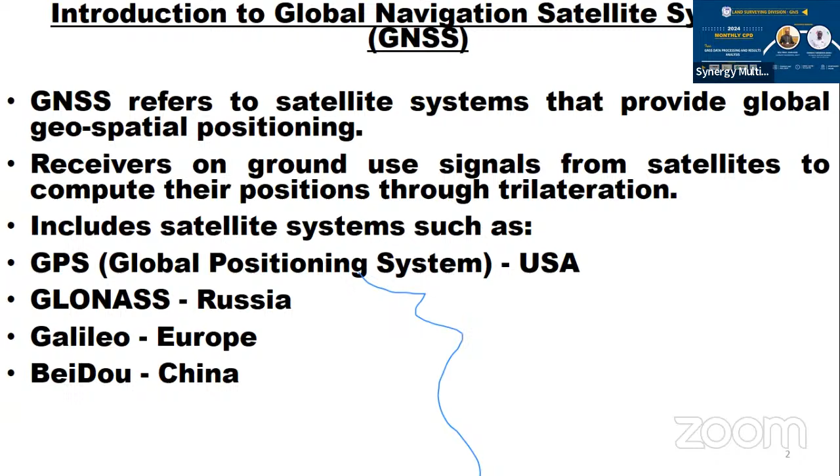We are talking of satellite systems such as GPS, the Global Positioning System, developed by the Americans. Then we have GLONASS, developed by the Russians, the European satellites known as Galileo, and the Chinese ones known as BeiDou. And now there are receivers that can receive signals from all these systems, hence the shift from simply using GPS to GNSS.

Well, GNSS has three main components. We have the space segment, the satellites orbiting the Earth. With our receiver, we need a minimum of 4 satellites so that we can have a fixed solution of our location. These satellites send their location signals, which may be received by our receivers on Earth.

Then we also have a control segment, ground stations which monitor and manage the satellite systems by sending them data for controlling and calibrating their own positions. A typical example of a station we can use on the ground to control errors is a base station, which is normally set on a fixed position, and which we can now replace with our various CORS stations. Then we have the user segment, the receivers that individual end users carry on the ground.

So the question is, how do the satellites themselves know their position? They determine their positional information using a combination of precise timing and clocks, regular updates from the ground control stations, and also orbital mechanics calculations.

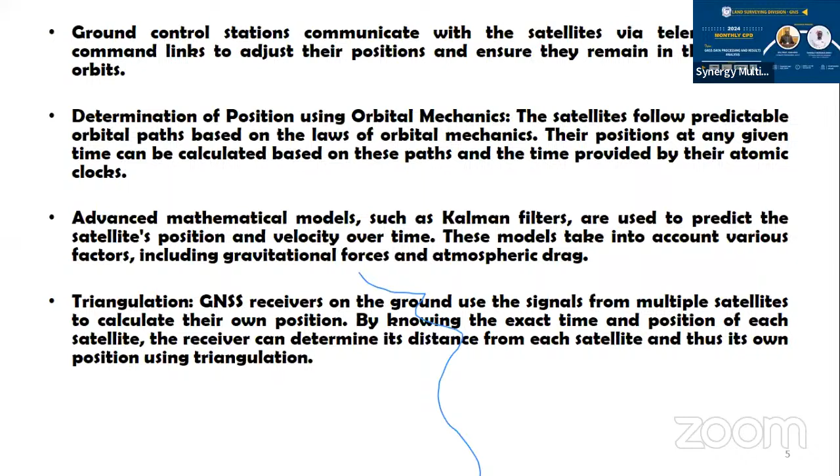Now, what kind of data are we receiving from the satellites? The satellites will be sending us what we call pseudo-range data. That represents the distance between the GNSS satellite and a receiver. It will not send the distance directly, but when we receive a signal, it also sends the time at which that signal has been sent. And so when we receive it, we can calculate the time difference between when the signal has been sent and when it is received. And that can be used in computing then the distance of the satellite from the receiver position. And that is what we call pseudo-range data.

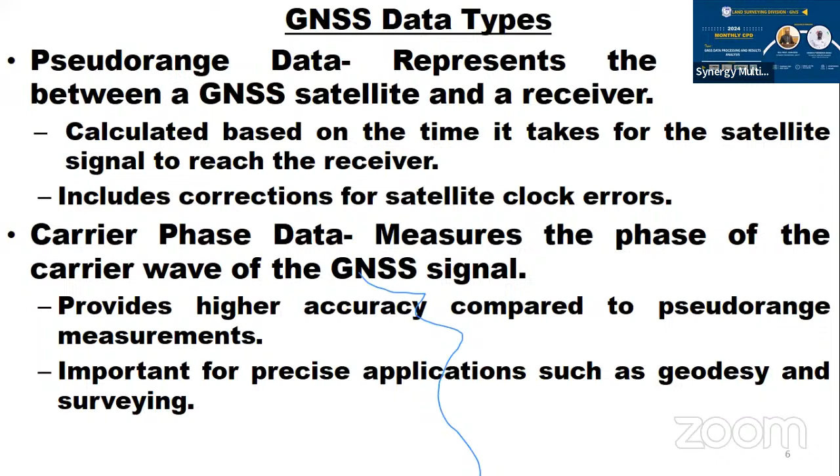And of course, the information that is sent would often also include corrections for satellite clock errors. Then we can also have what we call the carrier phase data, where the receiver is able to measure the phase of the carrier wave of the GNSS signal. And that is used so that we can have higher accuracy as compared to only the pseudo-range measurement. And of course, we can also measure the change in frequency of the signal due to the relative motion between the satellite and the receiver, and that can also be used in calculating receiver velocities, and so on.

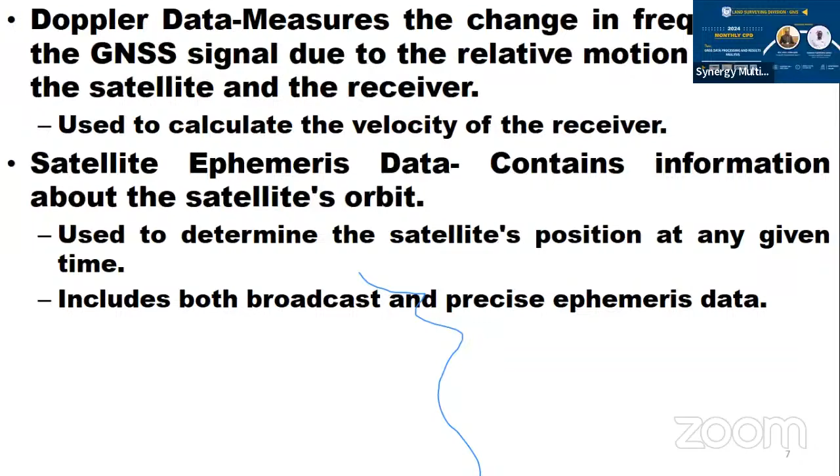So in all, we are going to be receiving all this information from the satellites, their position information, and then precise ephemeris data. But we have to know that this information would be passing through the ionosphere and the troposphere to get to us. And so, of course, the data providers will also have to provide information on the ionospheric conditions which affect the GNSS signals. And this can be used to correct what we call ionospheric delays in the signal propagation, and also the tropospheric conditions, which will also impact the signals.

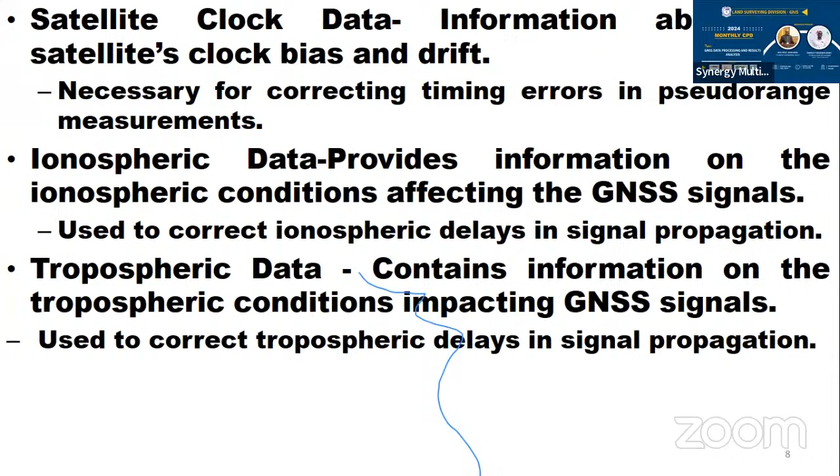So we are just talking about the fact that the signal is going to pass through outer atmosphere, and then it will pass through the Earth's own atmosphere before getting to the receivers. And so we have to do corrections due to this. Then there is also what we call multipath data. That includes information about signal reflections, which can cause multipath errors. And if we have that information, then it can be used in mitigating multipath effects on our measurements.

And so the raw GNSS data that we will receive would include all these different data sets, which we call the observational data, which will be collected by the receivers. And then, of course, we can use this raw data for post-processing so that we can improve on accuracy and also reliability. And usually, to be able to correct for most of the errors, we will devise different methods of collecting the data by using, for example, what we call differential methods, so that we can get corrections which would be used in correcting our data.

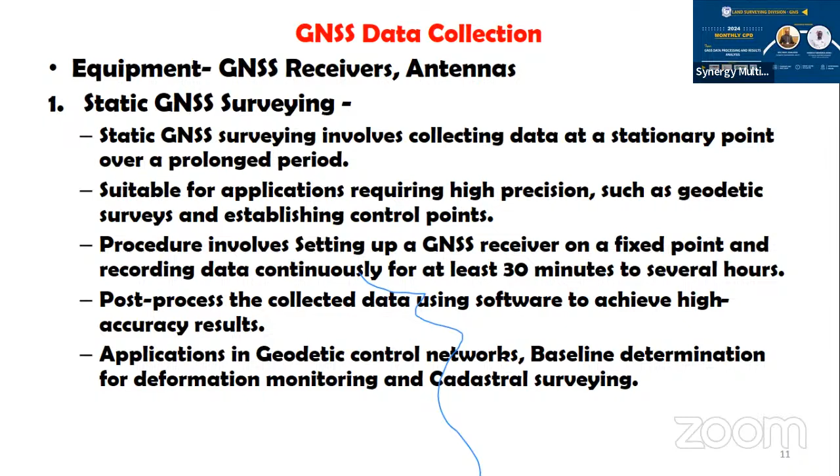For example, the procedure involves setting up the receiver on a fixed point and then recording data continuously for at least 30 minutes to several hours, and then post-processing the collected data using software so that we can achieve high accuracy results. But in normal use, we may not necessarily spend 30 minutes at a station because we may not be looking forward to establishing controls, high accuracy geodetic controls, for example.

And so we can resort to kinematic GNSS surveying, and that involves moving the receiver from place to place. And so that can provide real-time position updates, and it's mostly suitable for dynamic applications. The procedure involves setting up a base station again at a known location. Then we have a receiver which can move along the survey path so that we can be receiving corrections from the base station in real time, which can then be used to correct the rover positioning. And that is the kinematic method.

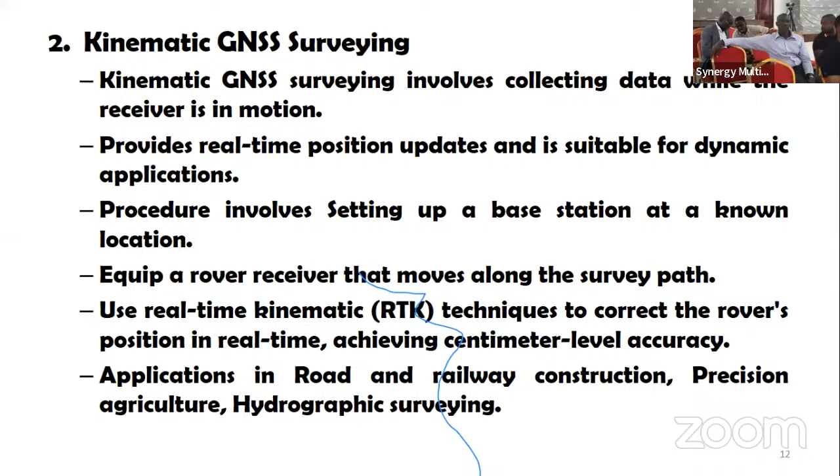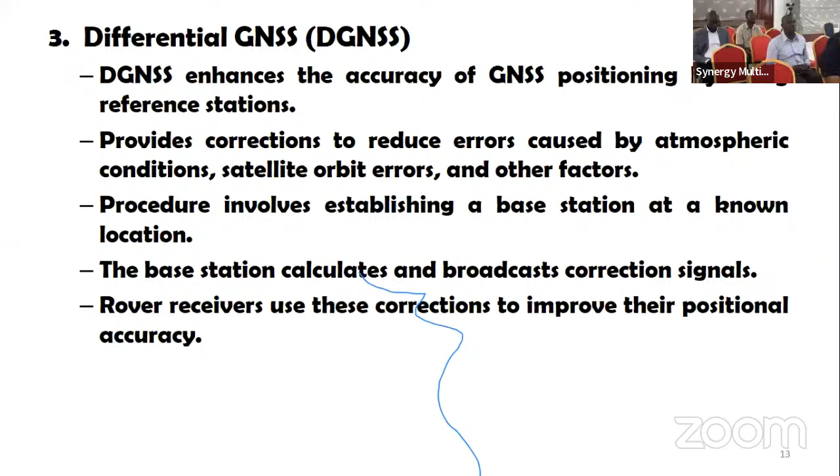And it's similar to the differential GNSS method, which we usually recommend for most work because it will enhance the accuracy of our positioning. That also uses a reference station or a base station, and we can have the corrections transmitted, or else we wait and do post-processing where we put in the correct coordinates of the base station, and then the corrections will be applied to the rover receivers. And that will improve positional accuracy.

A similar method is what we call real-time kinematic GNSS processing. The only difference here is that the corrections are transmitted in real time. Again, we are using a base station, but we also need transmitters and receivers that can receive the corrections from the base. And when we go far away from the base, we still need to use a radio station or cellular networks or even the internet to access these corrections.

Okay. Now we can also do this on a very large scale. Hence we can talk of a network real-time kinematic method when we are using several base stations in a network and the corrections are applied throughout the network. Okay, most of us would collect our data and do post-processing. That means that we do not process until we have finished collecting the raw data.

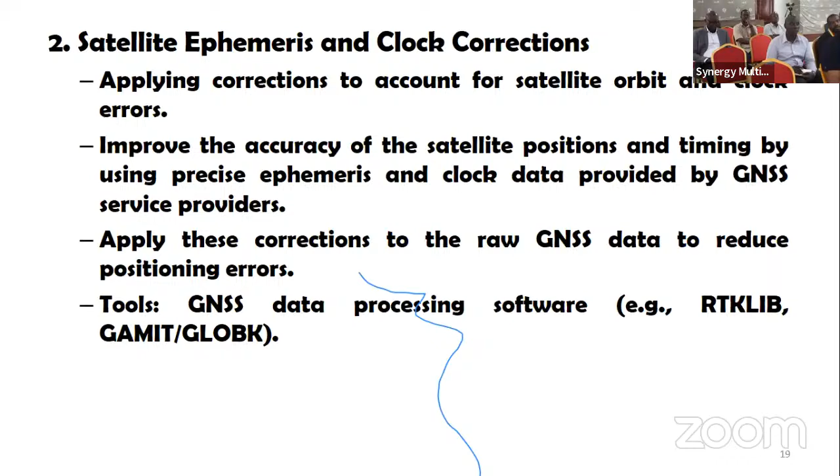That will also improve the satellite position and timing using precise ephemeris and clock data, which is provided by GNSS service providers. And these corrections are applied to the raw data before it can be further processed. Again, many of the GNSS data processing software have a tool for doing that. They have RTKLIB tools and GAMIT and GLOBK tools inside the software for accounting for some of these errors.

And when it comes to the ionospheric and tropospheric corrections, many of the providers, again, have some models inside. One of the popular models is called the Saastamoinen model, which can account for tropospheric delays in the data.

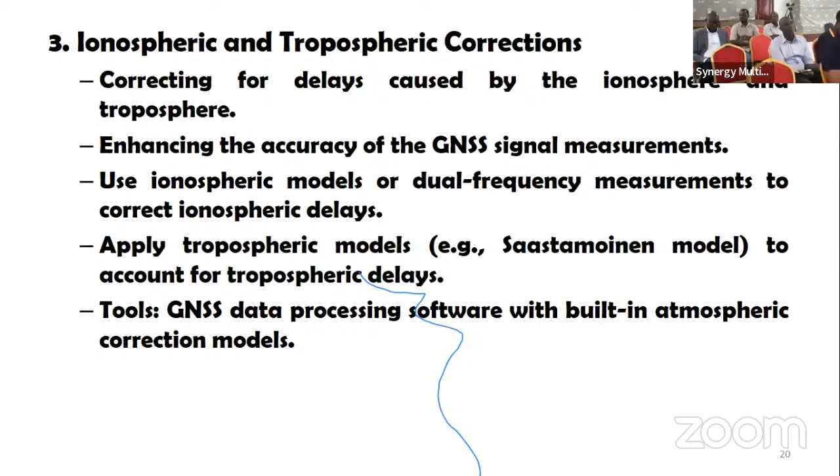And many of the processing softwares, again, have some built-in atmospheric correction tools for correcting for the ionospheric and tropospheric errors. And then, of course, the big one is multipath mitigation. One of the things we have to do is to make sure that we are not setting our receivers close to smooth surfaces and tall buildings, which can cause multiple reflections of the signals before reaching our receiver. When we avoid multipath, it will ensure the integrity of the measurements.

Again, there are multipath mitigation algorithms and filters in many of the GNSS processing softwares that can help us in doing this. And I guess that Derek will be taking us through some of these corrections in the course of demonstrating the processing using the Leica processing software later on.

The other thing is to make sure that the data we are getting is in the correct coordinate frame. And here again, even though the GNSS itself would have done all its computations in the WGS84 ellipsoid, there are built-in functions that can actually project to specific coordinate systems, so that our data is converted to the correct format before we can use it. So there are coordinate transformation tools in some of the softwares which can do this transformation for us. Of course, without doing any transformation at all, the coordinate given would be far from what the base coordinate itself would have been.

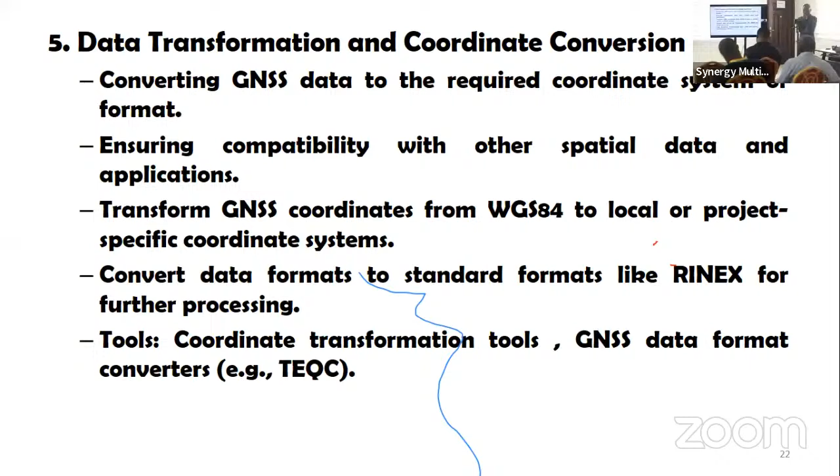And for that matter, the correction error which has to be transmitted would be very large, and some systems put a limit that if it is so far away, then the solution cannot continue. So it is important to get something very close to the base station coordinates before most of the processing can continue. And so we can apply all these corrections as differential corrections in the processing software.

Okay. There is also another type of error, which is called cycle slip. And here again, there are tools in the GNSS processing software which enable it to determine cycle slip and then correct it before the processing using inbuilt algorithms. Okay.

The last thing I want to talk about here is what I call synchronization, because at times you would have collected different GNSS data using different receivers, for example, and you want to process all of them together. You want to be able to align all of them to the time that they were collected so that they can connect to the base data. And the softwares will use synchronization tools that include timestamps of the time you collected the data, and also the time that the particular CORS station or base station you are using collected the same data, so it can synchronize before processing.

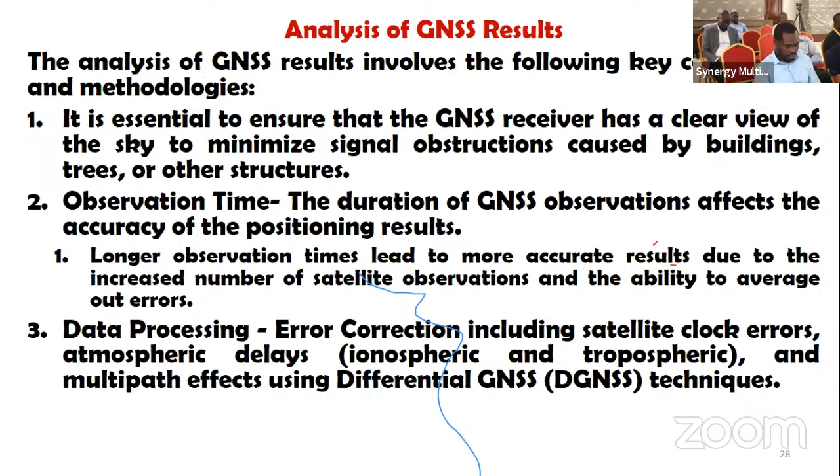Okay. Then the third thing is the data processing itself. And of course, we have mentioned some of the errors that we have to take care of. And many of these errors can really be eliminated when we are using differential processing. And so no wonder they have told us that we should all be doing differential processing most of the time. Okay.

So what kind of quality assessment can we do? Let me talk of the coordinates themselves. We can check our coordinate output by comparing the result we are getting with known coordinates, okay? Then one other quality assessment we can do is to use a parameter called the dilution of precision, or DOP. When you have low DOP values, it indicates that we have better geometric strength of the satellite configuration. Therefore, our results are bound to be more accurate than when we have high DOP values.

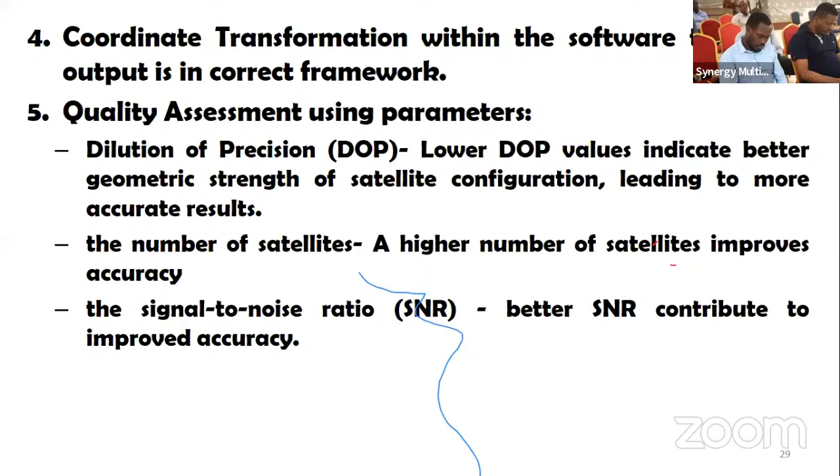And then, of course, the number of satellites. We have said that you need a minimum of 4, but the more the number of satellites, the better the improvement in accuracy. And then one other parameter we can be looking at is what is known as the signal to noise ratio. The better the SNR, the better the accuracy also.

And of course, our final step is to look at the statistical analysis. One of the ways we can analyze the result statistically is to use the standard deviation or the root mean square error. Well, I separated these two because they don't always mean the same thing. For example, if I have a very large number of points, then I can be talking of the standard deviation, because that is for a population, but for a limited number of points, we will be talking of the root mean square error.

Then, of course, we can also be talking of the confidence intervals: if I take a number of points, like 100 points, how many of them lie within my set criteria and how many are outside? If 95 out of 100, then I can say that I am 95% confident that my work is accurate. And so usually we'll talk of a confidence interval of 95%. Of course, that can be increased if we want higher accuracies.

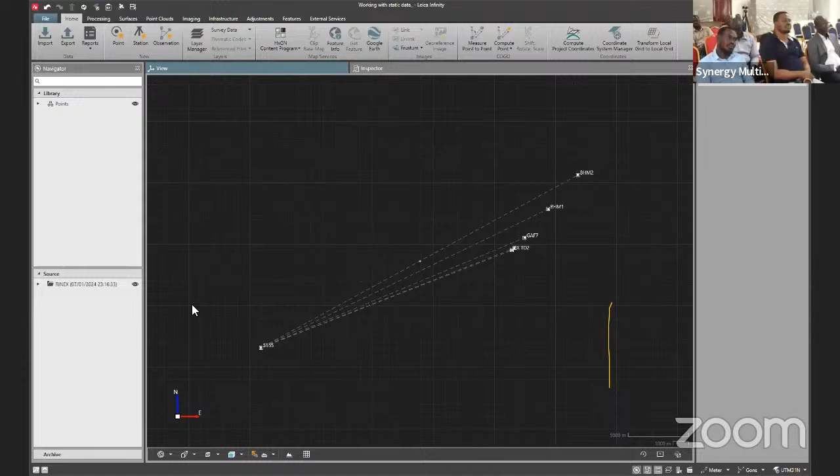The view gives you a map view of how your data is represented on site, right? So if you pick your data, you have a map view to see how the data is represented. Then the inspector is where you do the editing and the processing, selecting which one is the reference and which one is the rover point.

Okay, so for this example, you could see that I have some points here. So since in the beginning I said Leica Infinity is used for other processing, right? So the one that you are using is the one that you have to select. So in this example, I'm going to select the GNSS because that is the sample data I'm working with right now.

So if I choose GNSS, now I see my points with the occupation time, the start time, end time, duration, and even the satellite systems that you used, and also the occupation mode, right? So from this next screen, I could clearly see that the longest time is actually my base and the shortest ones are my rovers.

You could have certain data sets where you have multiple base stations. So you just have to know which one is your base and which ones are your rover points, right? So for this example, this point is actually my base. So in order to process, you could see that the points are all navigation points. Okay, so none of them is a control point now. So in order to specify which is a control, if I click on the point which is a control, you could see I have a property tab, which is on the right side of the screen.

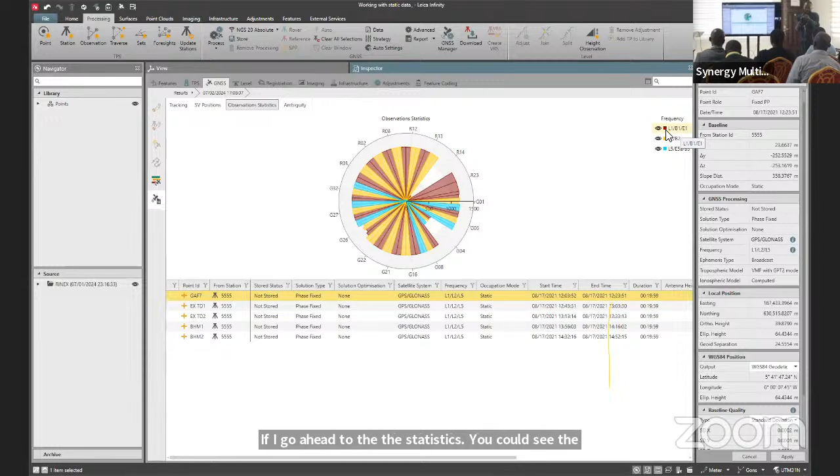If I go ahead to the statistics, right, you could see the various frequencies of the satellite system that it was tracking. So for the GPS, you could see it track the L1, B1, and the E1. If you look at the ambiguity, you could see most of the positions were resolved. So meaning the data we were picking were actually not under a canopy. The sky was really clear. So most of the ambiguities were resolved.

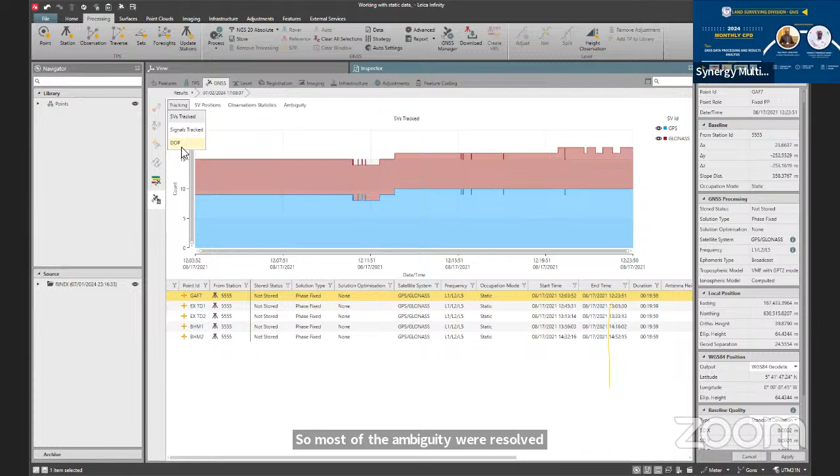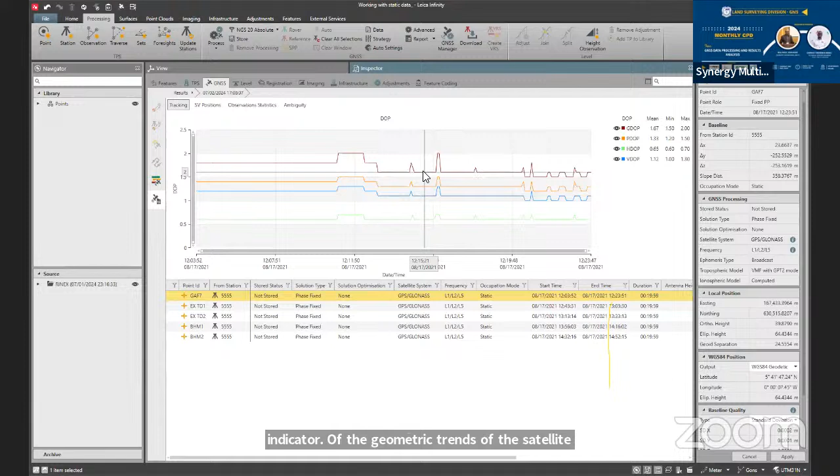Okay. So Reverend Ayer talked about the DOP. So DOP is an indicator of the geometrical strength of the satellites being tracked at the time of measurement. What it simply means is the effect of the satellite geometry on the accuracy of the GPS. So it quantifies how well distributed the satellites were. So we don't want very high, so a low DOP means we will have good results, right?

So you could see from the graph, there were certain times that we had very high DOPs, but if you are taking the optimum or the mean deviation of the DOP, you could see we had a very good distribution throughout the data capture.

So to export your results, you can actually print out a detailed report of the processing I just did. So that gives you a bit more detail on the baseline, the satellites it used, the coordinate system, the various satellite systems that it tracked. Okay. So if you look at this reporting, it gives you a very detailed representation of the data capture that was done on the field.

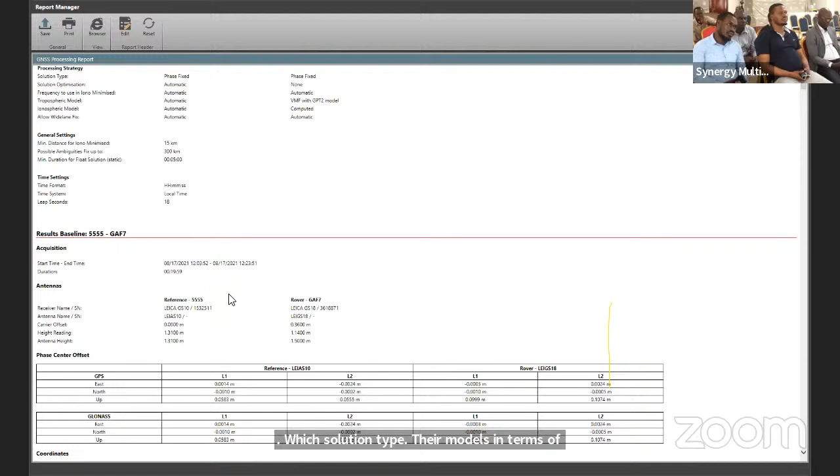So it gives you the coordinate system that you used, the various parameters in terms of sampling rate, which satellite systems were selected, which solution type, the models in terms of ionospheric and tropospheric models. Okay, you could see from the next line the baselines. So this report is a detailed report on the processing that we just did in terms of the standard deviation of the controls, in terms of the L1 and the L2 satellite systems, right?

If you are looking at the satellites that it tracked, you have a graph and a signal representation of how the satellite tracked. As I said in the beginning, we wouldn't want our data to have a lot of gaps. So like this, if you have a lot of gaps in your data, then in processing, having a fixed position becomes a problem.

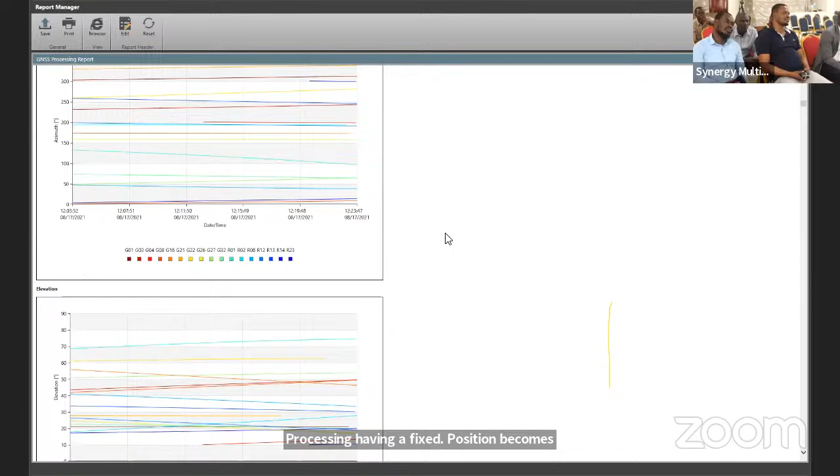So this is more of the azimuth, as I showed earlier, the angle at which each satellite system was positioned whilst the GPS was actually receiving signals from the satellite. You have the DOP, and you have the observation statistics.

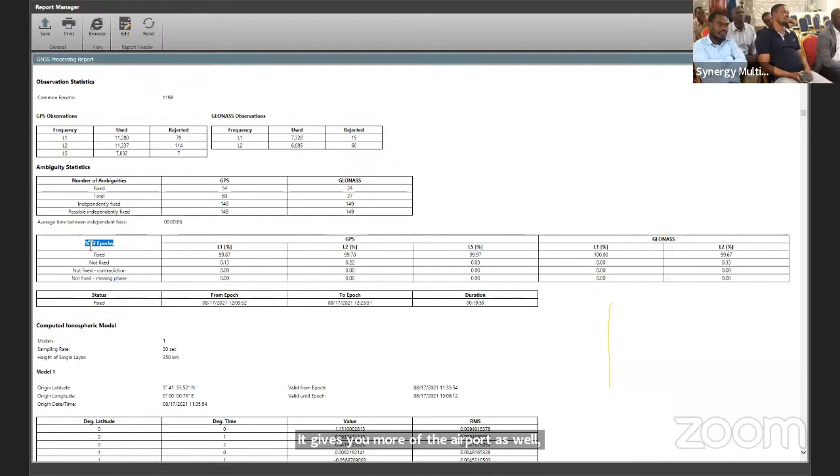So the number of L1 that was used, which ones were rejected, the number of satellites that were tracked, which one had a fixed position, which one didn't have a fixed position. It gives you the epoch as well, percentage of the epoch in terms of fixed and non-fixed. So the idea is that we want our non-fixed to be minimal. We want our fixed percentage to be the highest, right?

So if you process your data and you see that there's a high percentage of the non-fixed, right? You can drill down to the positions or the specific satellite that we didn't have enough data or correct data from, then you can actually exclude them from the processing.

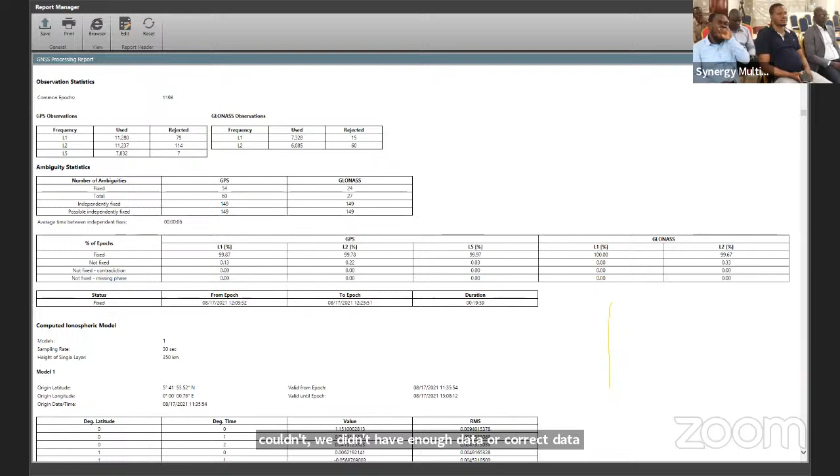So to do that, if you go to the data, if you go to the satellite use, if I choose manual, I can specify which satellite system or which satellite I should use. So if you realize one of the satellites was giving you bad data, you can actually take that off from your processing. Okay.

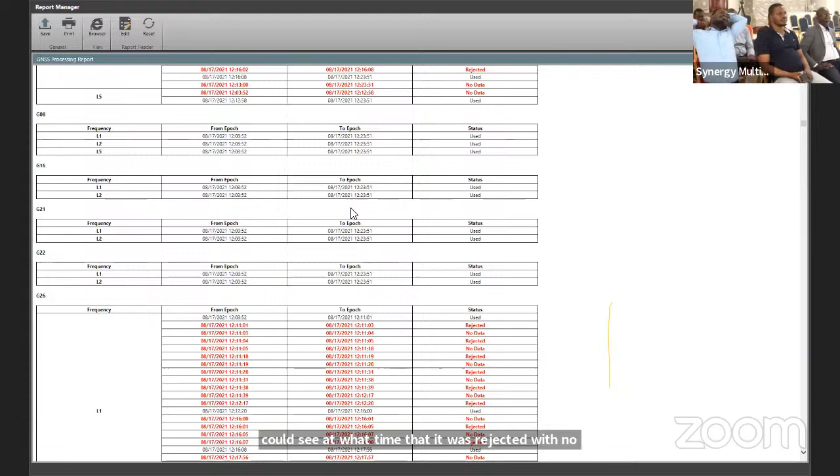So this is kind of like a detailed report. So as I showed with the satellite that was rejected, you could see at what time it was rejected with no data. So with this, you have a thorough reporting on whatever you've processed in terms of the GNSS data that you picked on site.

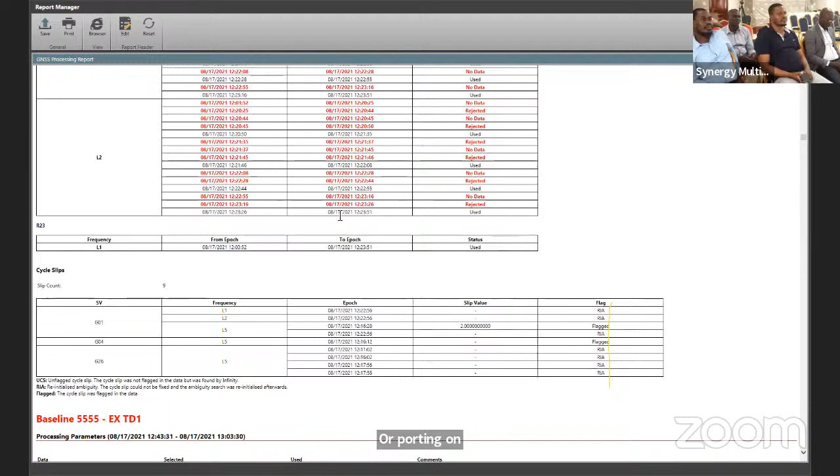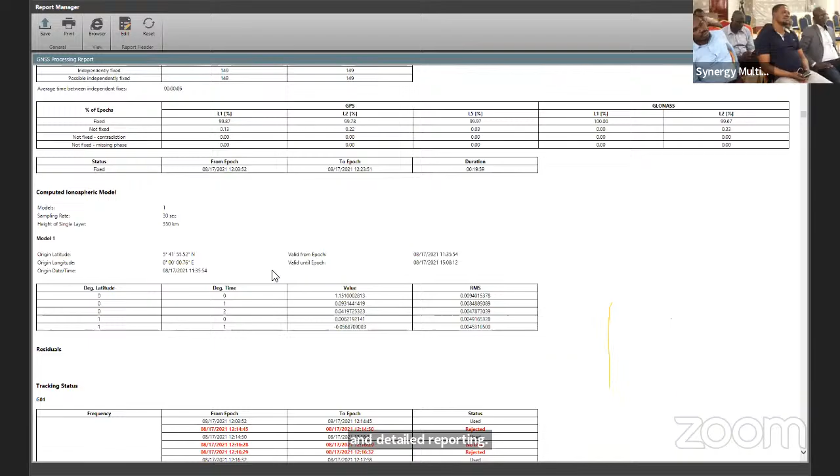Okay, so this is actually done for each of the rover points. So each rover point gives you that particular detailed reporting. So you could see the first one was with the first rover point. If you move further down, then we are now looking at the second rover point, right?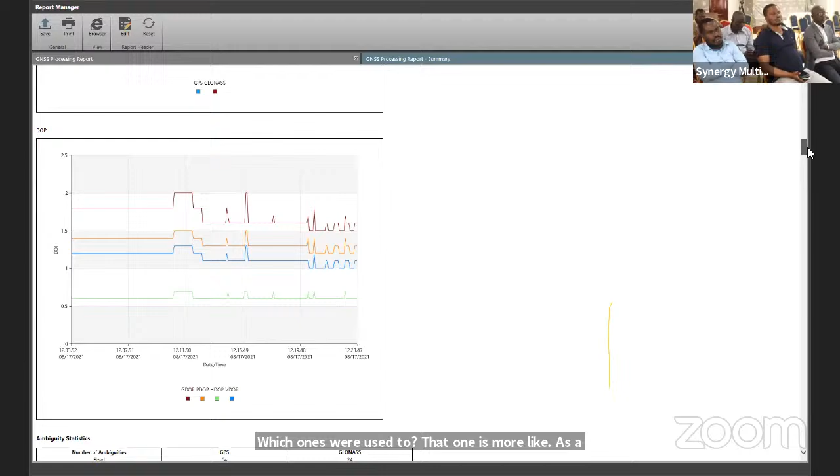We as well have a simple reporting which puts all the data together as one. So if you don't want a detailed report, we have a summary reporting as well, where it gives you a summary of the satellites that were tracked, the DOP, which ones were rejected, which ones were used. So that one is more like a summary of all the rover data. So it gives you a summary of the data representation. Okay.

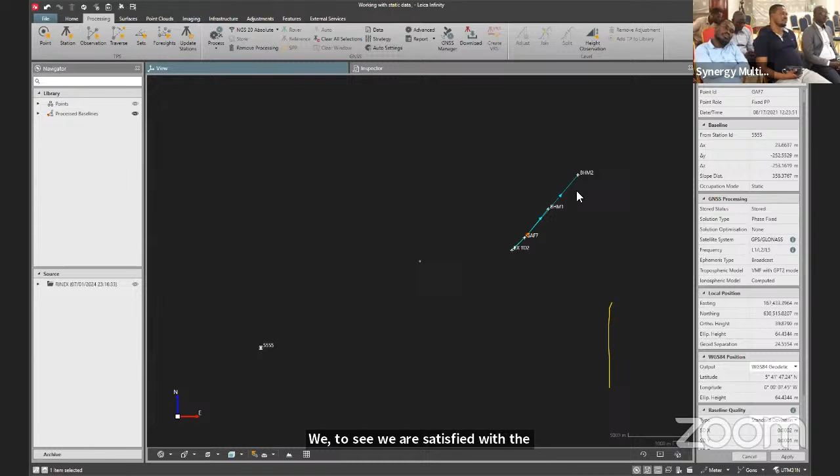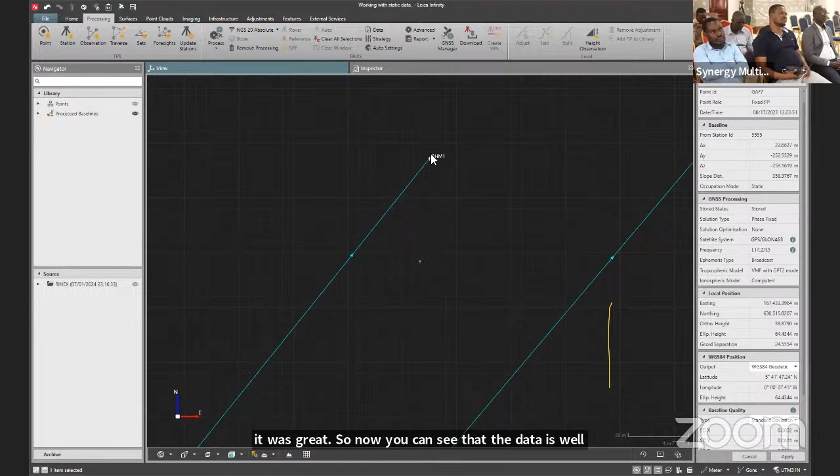Okay. So when you're done with the data processing, we then store to say we are satisfied with the result that we have. So if you come to our map view, you could see now you have a green baseline showing that the data is well processed. Right? You could see from the beginning when the data wasn't processed, it was gray. So now you could see that the data is well processed, showing the fixed position.

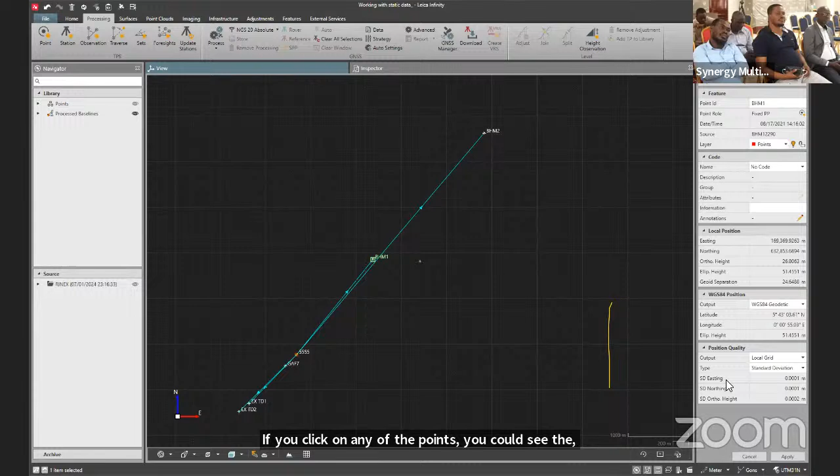Showing the fixed position or fixed coordinate of each of the points. If you click on any of the points, you could see the residuals, the position quality. So you could see the position quality for the easting, northing, as well as the orthometric height. So you can actually observe the position quality for all of them. So that is with the GNSS processing.

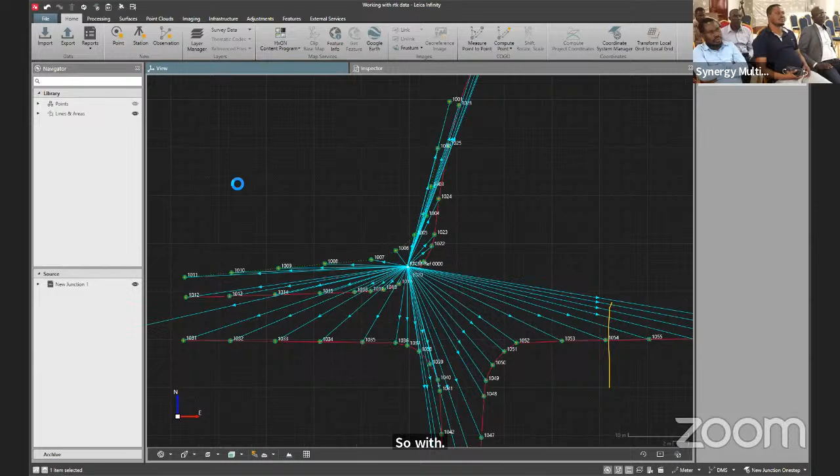I want us to just dive into how the RTK data is also displayed in Leica Infinity. So with RTK data, your corrections are actually being broadcast in the field. So you have correct data, which is processed with position quality being at the minimal, right? So there are instances where you've done your RTK data and you've made a mistake, maybe with the control data, which is where you have your base station set up.

Leica Infinity is a powerful software, so you wouldn't need to go back to the field to process your data. So you could see from here, I have my base point here, which shows that all the points which I picked were referenced to this particular position on the screen, as you can see.

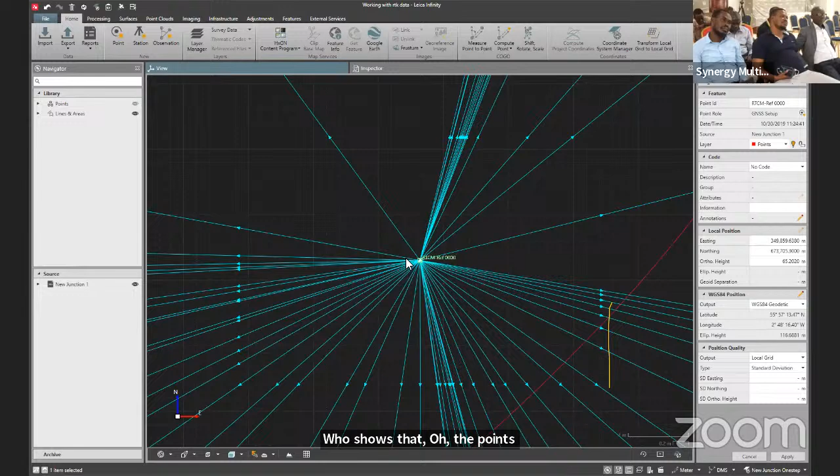So assuming I made a mistake with, let's say, the height of instrument. Leica Infinity is powerful enough that you can edit the coordinate directly here, and your points will actually be processed, or the baselines will actually be corrected.

So if I made a mistake with my base station, or if I made an error, so assuming, let's say, this figure was 5, right? I wouldn't need to actually go back to the field. If I correct this value, you can see the warning is telling me that the processing software has realized that the setup point has changed. So all the positions that were referenced to that particular control point will be affected. So it's going to actually correct all the baselines.

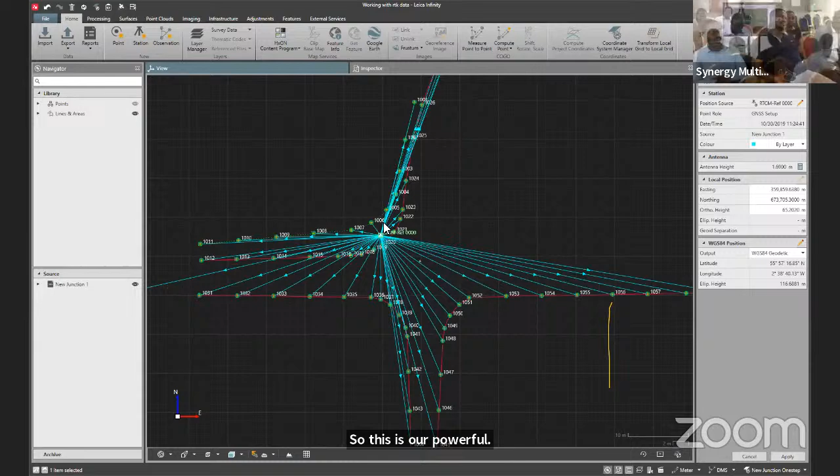So this is how powerful Leica Infinity is in terms of processing RTK data as well. Okay. So it actually saves you time, it saves you money going back to the field to actually process your data. We have a toggle where you can actually check where your points were actually placed on the Google map. So you can see you have a toggle here.

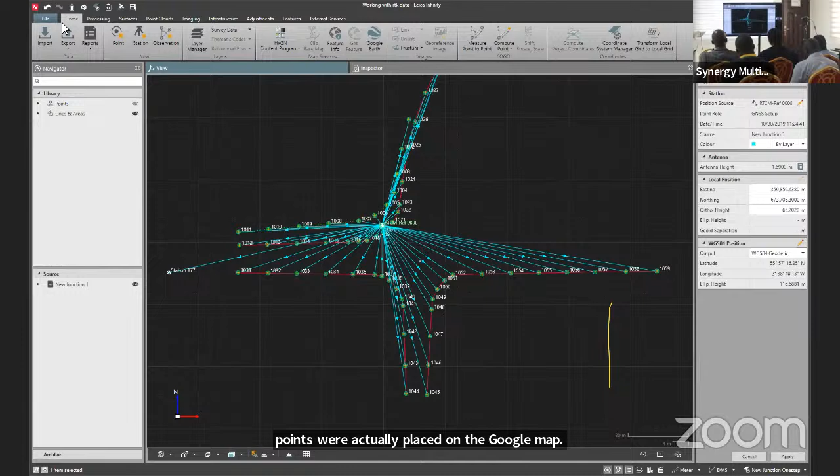So let me just go back to the static data. So if I want to visualize my data on the Google map, if I click on the Google map toggle, I don't know if you can see my Google map.

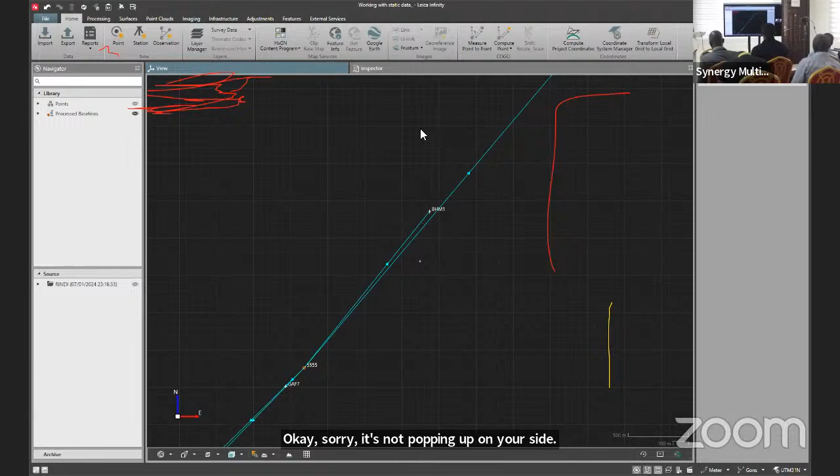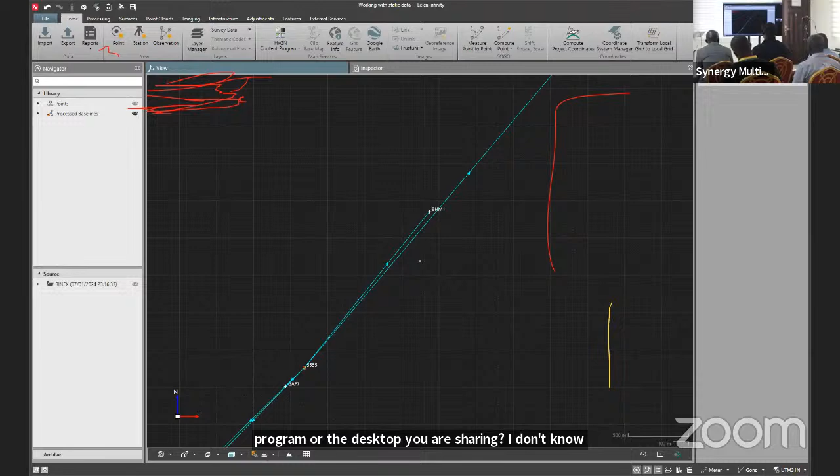Can you confirm if you can see the Google map? No. Okay, let me share the screen. Okay. Okay, let me just, sorry, it's not popping up on your side. Hello, Derek. Yep. Is this the program or the desktop you are sharing? I don't know where you find it. I think it could be a desktop. Okay. I mean your screen. Okay. All right. Maybe that is fine.

So I just wanted to show you how the data is being displayed on Google Maps. So if you want to visualize your data on the Google Map, then you have this plugin within the software where it takes you directly into the Google Map environment.

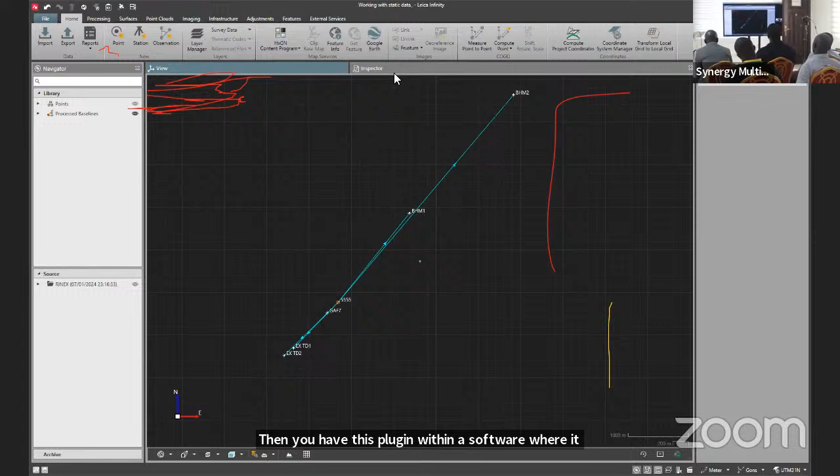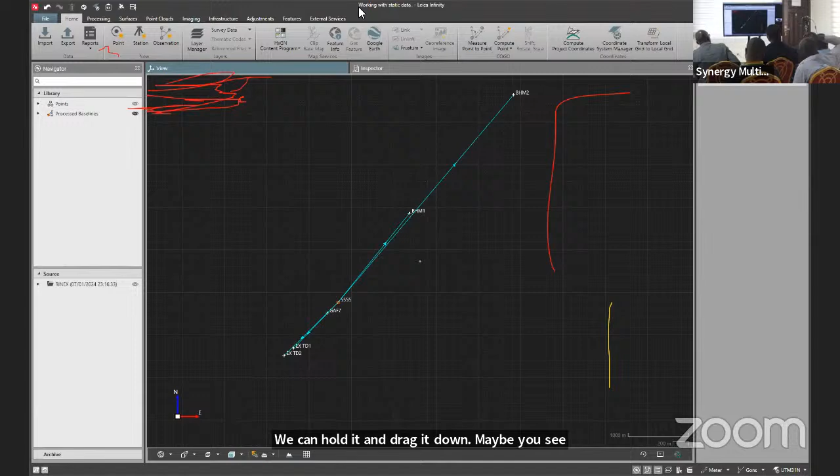So can you see the Google Map on your screen? Is that yours? Yes, I can see on mine, but try and minimize this program and let's see. Okay. You can hold it and drag it down. Maybe you see, I don't know. Okay. I think it will be my display. Still struggling. Okay, so you go ahead. Maybe later on in our own time you try and see. But if you get it, then let us know. Okay, let me. Okay, it's here now. Just confirm if you can see my screen. Yeah, we can see now.

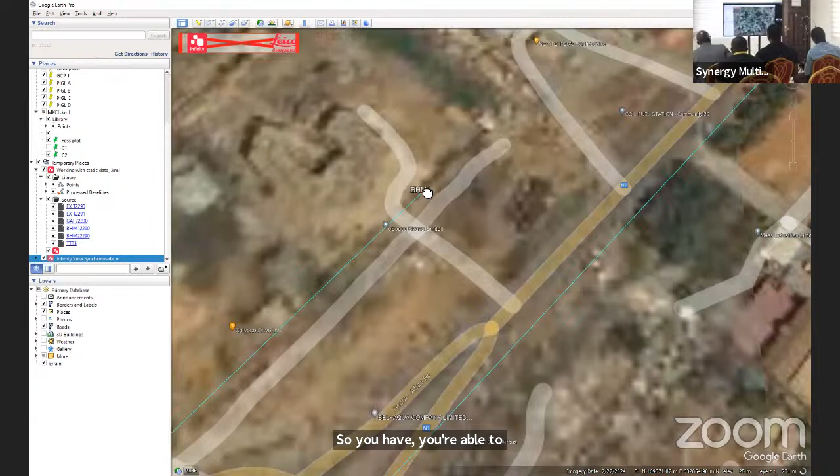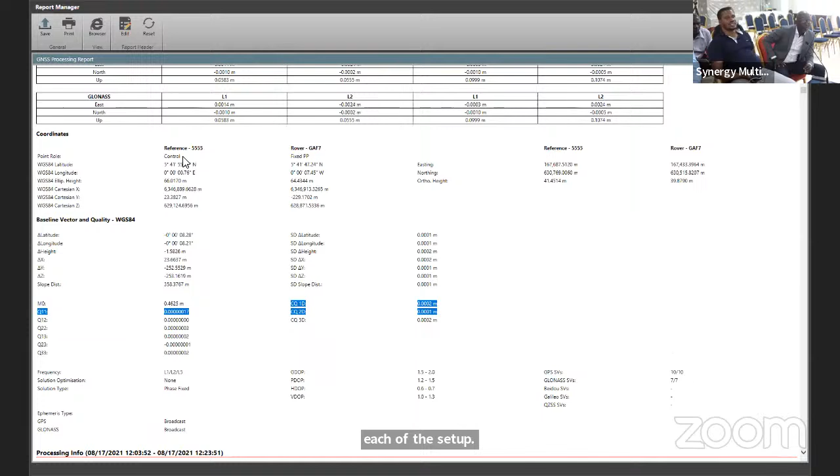Okay. So you could see from here, this is the baseline quality for each of the setup. So you could see the point role in terms of the latitude, the longitude, and elevation. Right. So if I come down to where I have the baseline vectors and quality, you could see at each point of the processing where it's getting the data from the base to the rover,

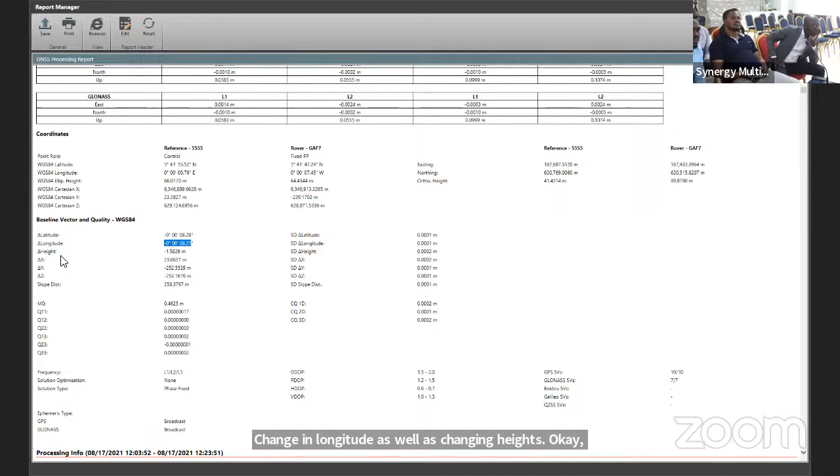you could see I have a change in latitude, change in longitude, as well as change in height. Okay, so these ones are just the difference between the change in X of the reference and the rover. And if I come to the next tab, which is the one on my right, this one more speaks to the standard deviations. Okay, so you could see from the standard deviation for this particular baseline, in terms of the latitude, longitude, and height, you could see the quality here.

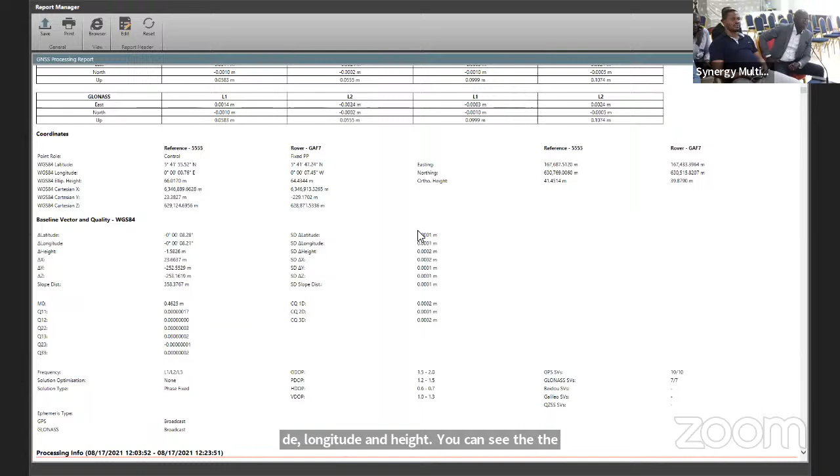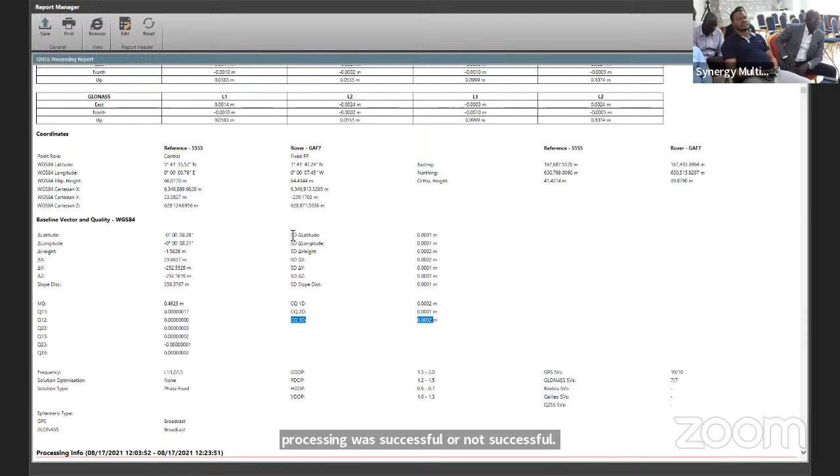And if you look at the CQ 1D, 2D, and 3D, these ones are with respect to each of the coordinates. So 1D is looking at just either the X, the Y, or the Z. 2D is looking at X and Y, and the 3D is a combination of the three. Okay. So in order to assess if our processing was successful or not, we actually analyze the baseline quality, in terms of the standard deviation, as well as the position quality here.

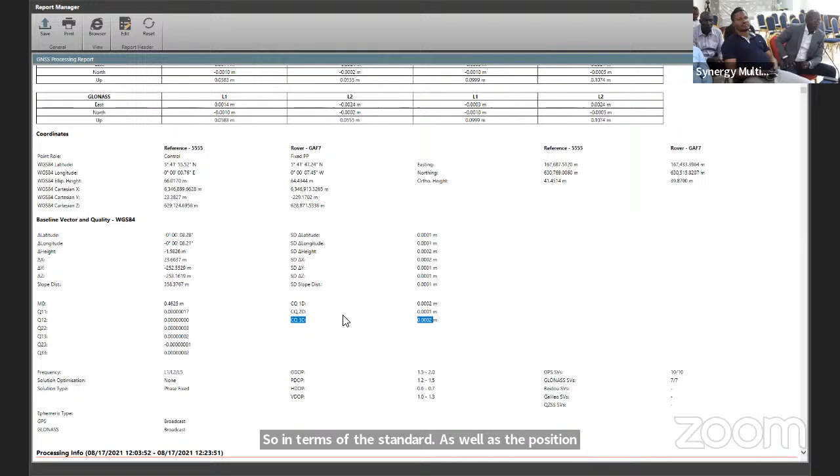Okay, and you could see from here that if it's not processed, you have either a phase float, or code, right? But from this processing, since we have very good standard deviation in terms of the position quality, you could see the solution is phase fixed. So these are the things that we normally look out for when we want to check the quality of the data that we've processed. We look at the standard deviation between the reference and the rover, right? So this is in terms of the baseline.

And in terms of the position as well, we look at the CQ, so the 1D is either the eastings, northings, or elevation. So depending on which one we are interested in, because some processing wouldn't actually have a need for the height, we will be much concentrated in the 2DQ, which is the X and Y. But if you are interested in the elevation, then we look at the 3D quality for the position.

Okay, thank you so much. There are some other questions. Okay, so it's a follow-up question.

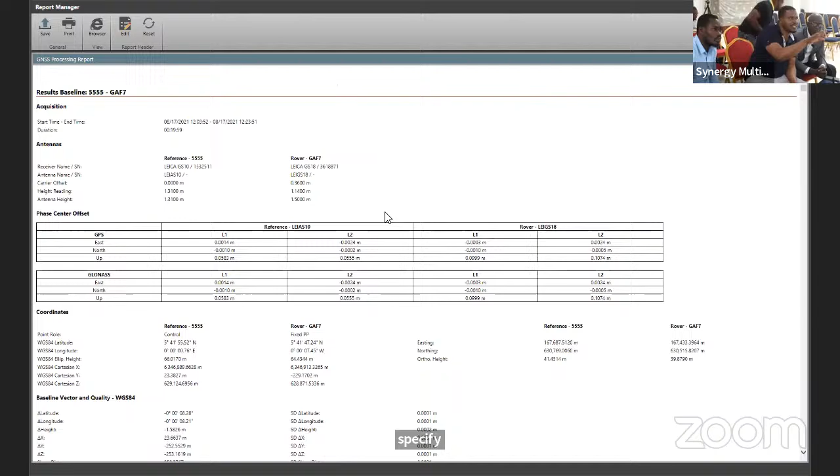With this report, because the interface is a bit new to me, can you specify if the various points are listed there and the various standard deviations and the rest? Because you were showing change in latitude, change in longitude, but for the various points, can you specify the various errors and those that have been shown in the processing?

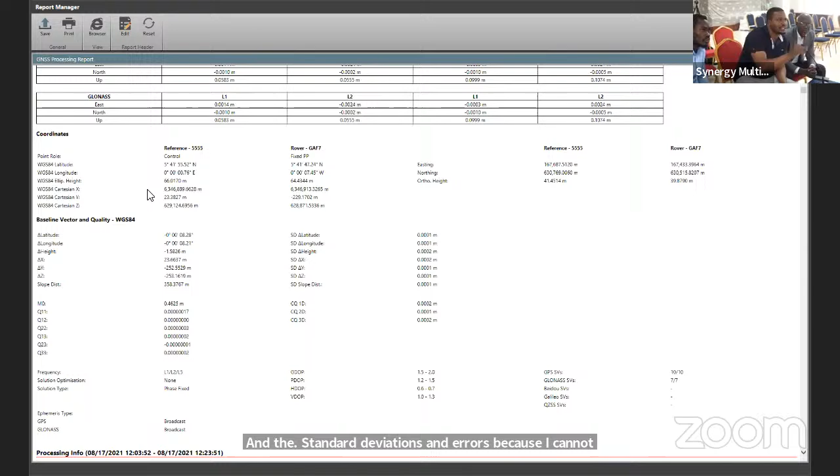Okay, so you could see from here, this is showing the baseline from the base to rover point 1. It shows us the reference information as well as the rover information. So when you come down to the coordinates, you have the reference coordinates and the rover coordinates. So these ones are the WGS84 coordinates as shown here. And this is for the rover as well. So you could see from the title here, sorry, this is for the reference data. This is the rover data.

And if you move to your right, you could see the local coordinates, which we inputted. So the one we inputted for the base is this one. And the one that was processed for the rover is this one, right? So if you come down to what we're seeing during the processing, if I minimize this page, and I select the first rover point, you could see on my right tab where I have the property tab, I have my baseline quality.

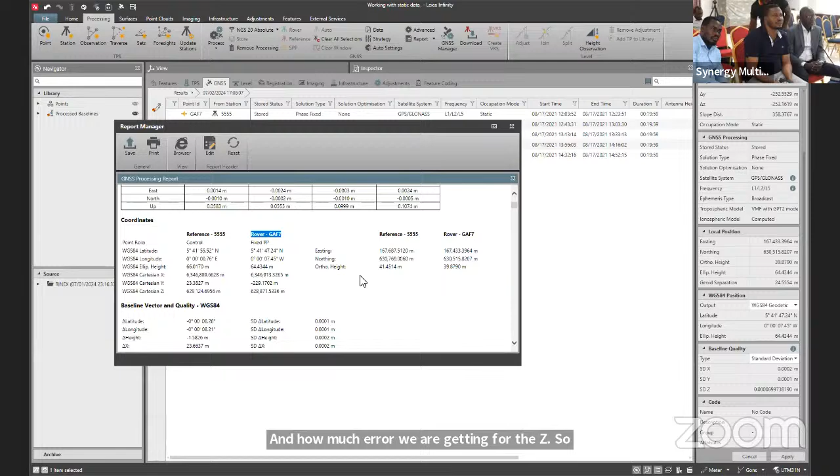And you could specify the type, either you're using the standard deviation or the cofactors, right? So normally standard deviation is what we use. So in terms of the standard deviation of error in the X, this is how much error we are getting for the X, for the Y, and for the Z, right? So that is the same thing showing in the reporting, but this detailed reporting drills down to the latitude and longitude as well as even the baseline, which is the slope distance between the reference and the rover point.

Reports, okay. Yes, so we have the simplified report, so you could see if I go to the home, I have the point code, point quality, and point history. Okay, so if I go to the point quality, I will have my point, the point role, as well as the easting, northing, orthometric height, and the ellipsoidal height, and the 3D quality, as I mentioned in the detailed

report. So the one I was showing was actually a detailed report showing you a bit of the error of the baseline, the satellites that it tracked, the DOP, and all that information you get in the detailed report. But if you want a simplified report, then yes, you can get it from the point quality report, which is located at the reporting tab. So what I was showing was a detailed report of the processing that you've done.

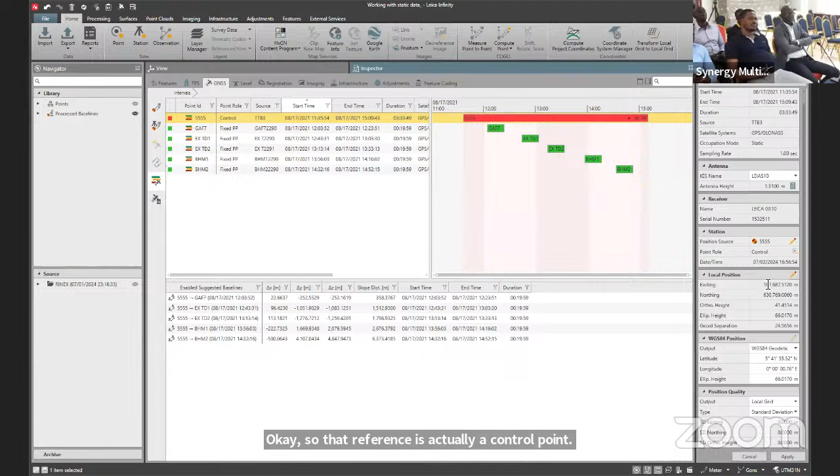Okay, so can you please cite an example where the base can be edited, and is it editable in static mode or rover mode? Okay, so as I said, if you are processing your data, we normally set a point on a reference. That reference is actually our control point, whereas what the GPS gives you is actually a navigated point. So in order to specify that that is the true point, we can now edit and put in the correct coordinates.

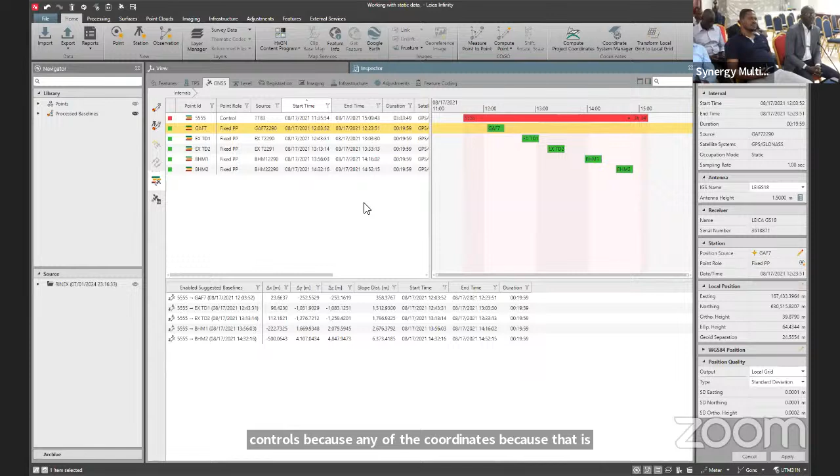So you could see that for the navigated point, it's impossible for me to edit any of the coordinates, because that is a navigated point. Those points, I don't know the coordinates, but the ones where I know the coordinates, it gives me the chance to edit by specifying that this is actually a control. So if you look at the point role here, my reference is actually a control. That is why I'm able to edit.

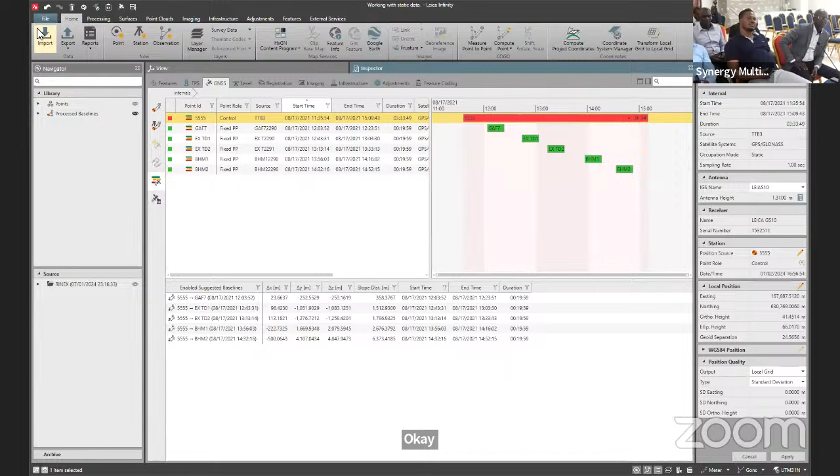Okay. So in rover mode also, you have the chance to edit the base point, not the rover point, because your corrections were actually coming from the base, right? So you could see from here, I have the chance to edit, but if I move to the rover point, I can't actually edit any of the coordinates.

Okay. So the next question is, can we get reference data from another software with the same data and parameters? Yes, so you can actually bring any reference data from any of the software, but if you are importing into Leica Infinity, it has to be in the RINEX data format.

Please, what's the difference between the TopCon software and the Leica software? So using me as an example, I've not used the TopCon software before, so I can't really differentiate between how the two software perform.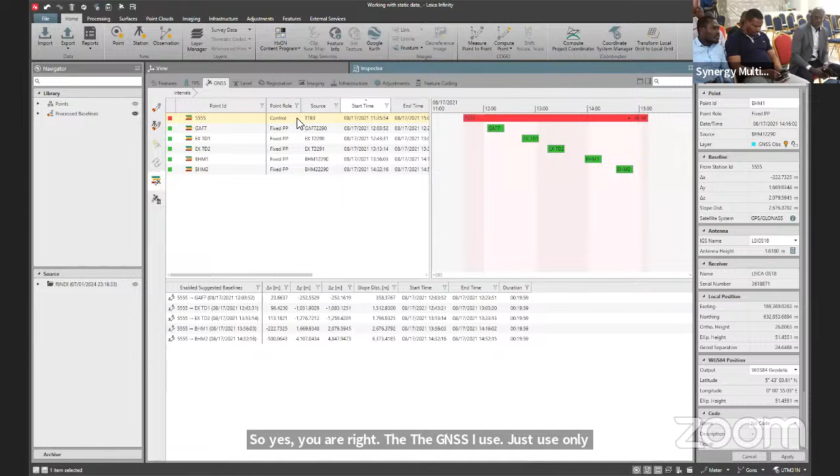So yes, you are right. The GNSS I used only two satellite systems, which is GPS and GLONASS, which you can clearly see from here. Thank you.

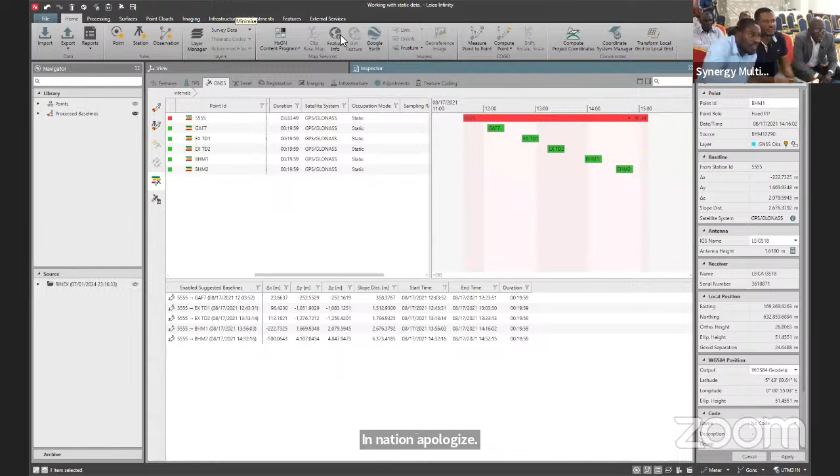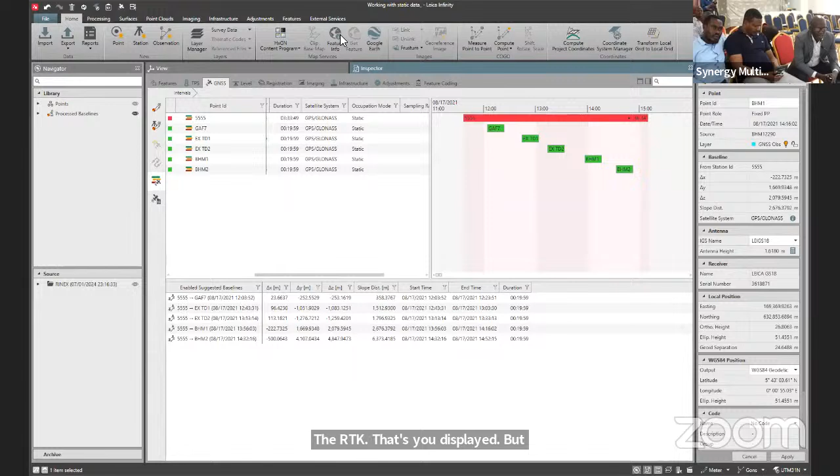I see one other question. Yes, that one is taken care of. So please, is it editing the difference coordinates or raw data? I think he's talking about the RTK that you displayed. But I believe that Maxwell had answered it. Okay. Unless you want to deepen it.

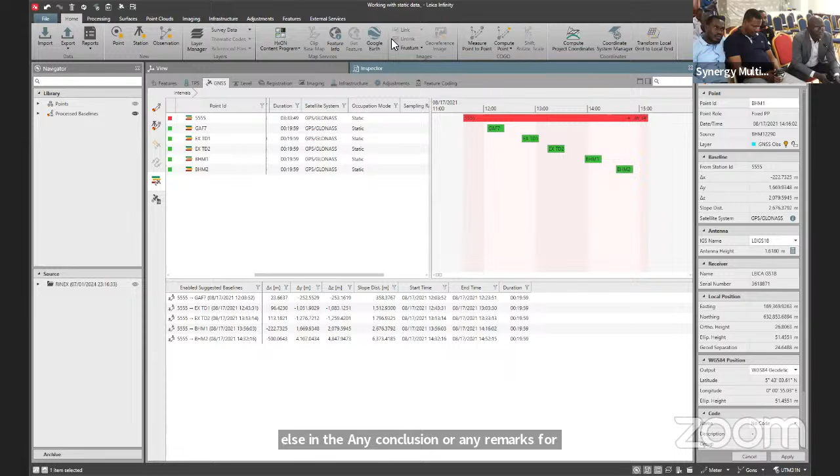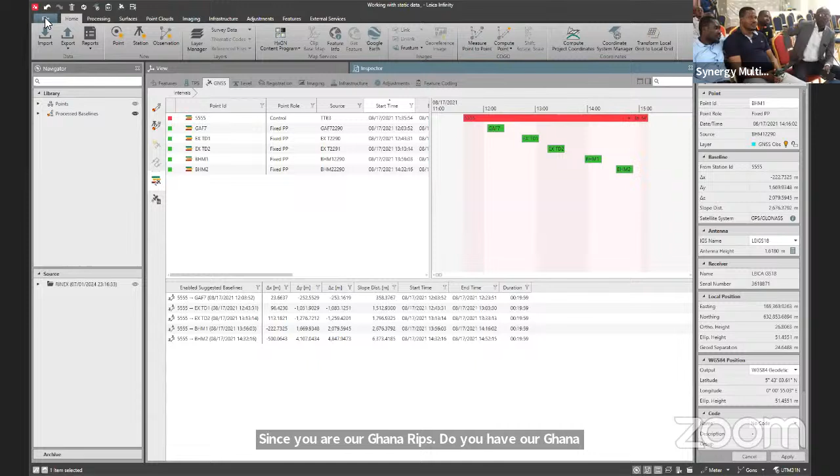Derek, the only thing is, since you are our Ghana reps, do you have our Ghana coordinate system also inside your coordinates? I see Ghana meter grid, and anytime we say Ghana meter grid, indeed we are still talking of Clarke 1880. So I want to know if you can influence so that our proper Ghana coordinates can also be accounted for in there.

Okay, thank you, Reverend. So the software actually gives you the chance to add or specify which coordinate system you want to use. It's not limiting you to, let's say, the meter grid. You could see from the coordinate system manager, I can easily create my own coordinate system. So here I can specify the transformation, ellipsoid, and a projection. This is just by creating the transformation here.

So it's not limiting you to a specific transformation. You can input your transformation parameters and save it. You can have your specific ellipsoid that you want to use and save that, as well as the projection. Then you can have a complete coordinate system that you can save and use. So you could see from the list I have the Ghana National Grid.

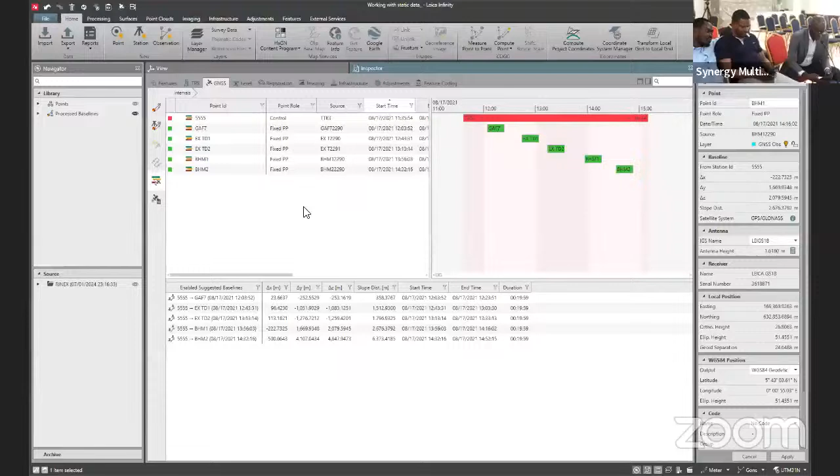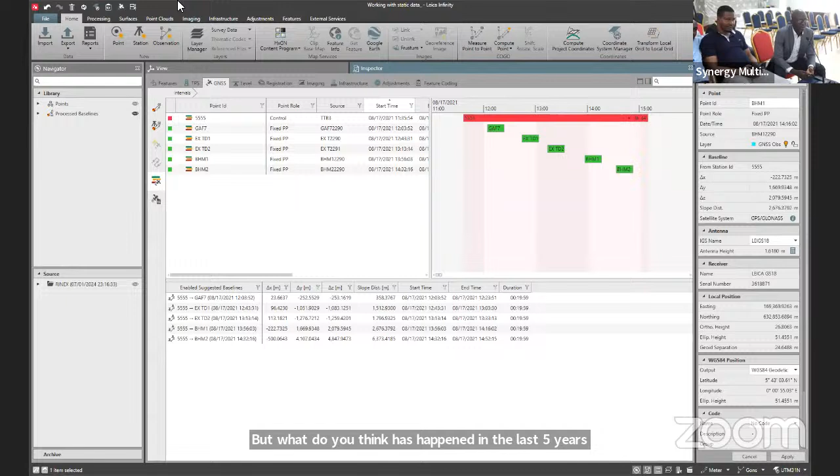So, Derek, there are a lot of very experienced people who have been working with these softwares for a very long time. I don't know how long your software has been around, but what do you think has happened in the last 5 years with the software that you think you should bring to the attention of those who have been using these softwares for a very long time that they don't know about?

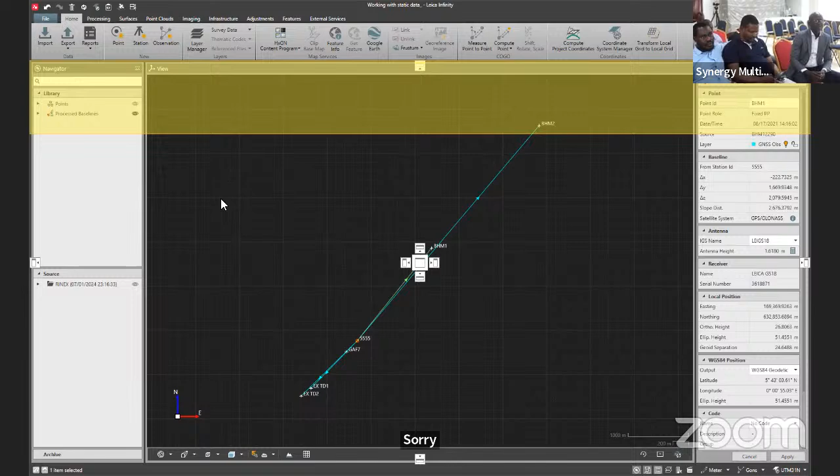Okay, so now they've actually added, sorry. Okay. So those that have already used the software before wouldn't have the laser scanning data option. Okay, so the version I'm using now has the module where you can process laser scanner data. Okay,

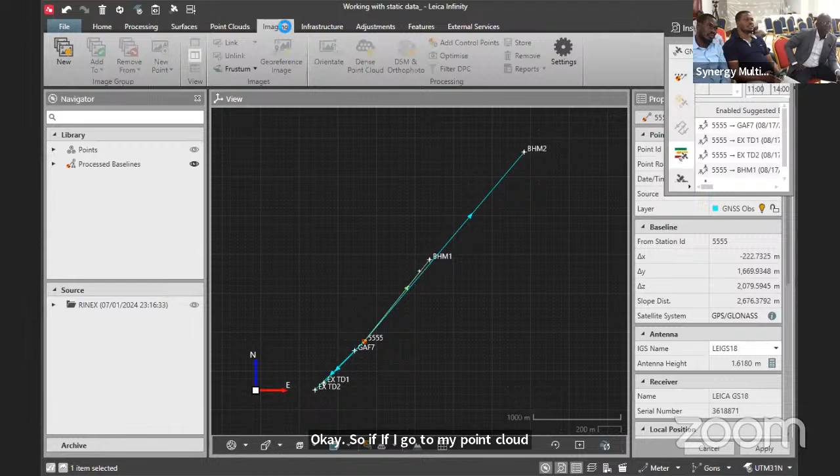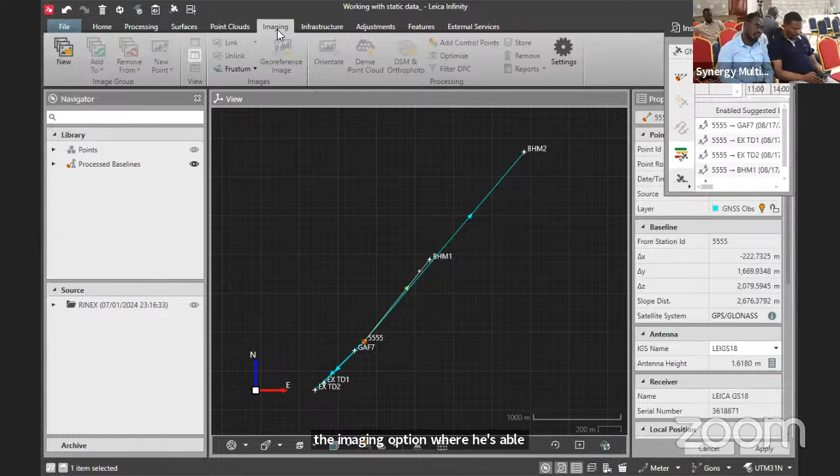so if I go to my point cloud, point cloud and imaging is where you bring in your laser scanning data. So these are some of the modules that have been implemented in the new versions. So if somebody has a previous version of the software, he might not have the imaging option where he's able to actually process scanning data from a laser scanner. Yeah.